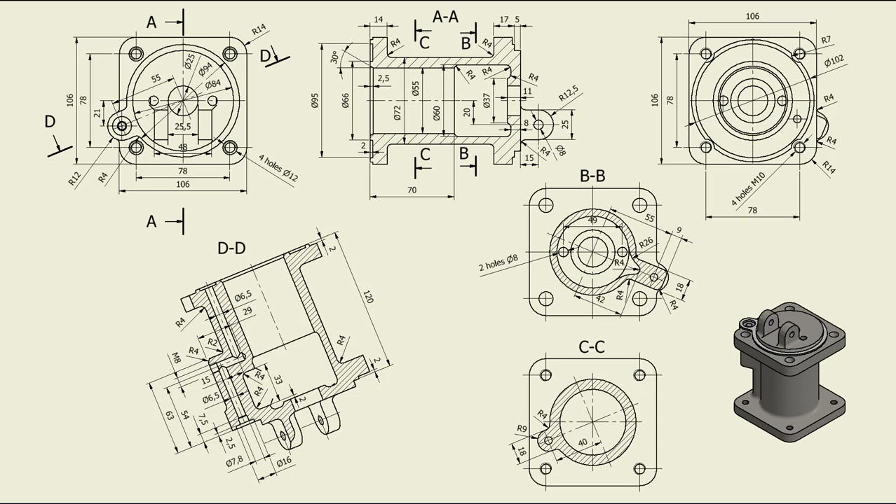Hi my friends, let's model part number 98, side housing, from my collection of 100 parts.

The picture shows us what this is about, and we can see there are two plates and maybe a hollow inside.

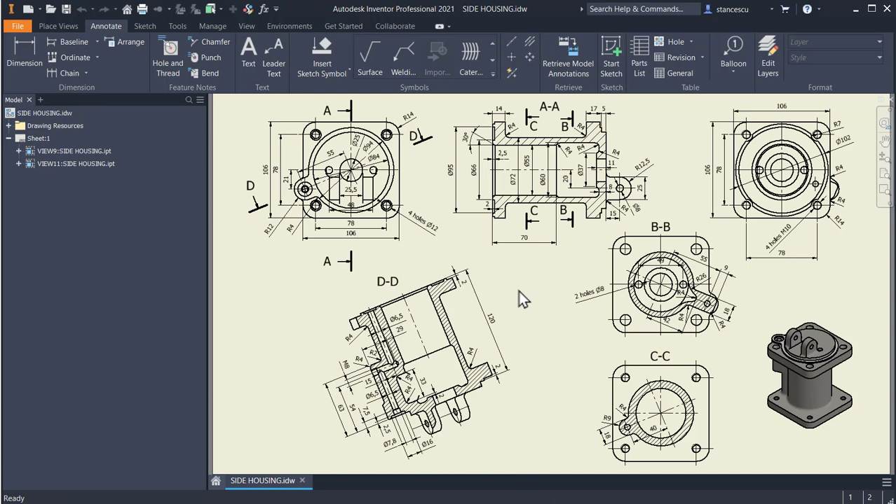The drawing is this. It seems nothing complicated. There are some holes here, but no problem.

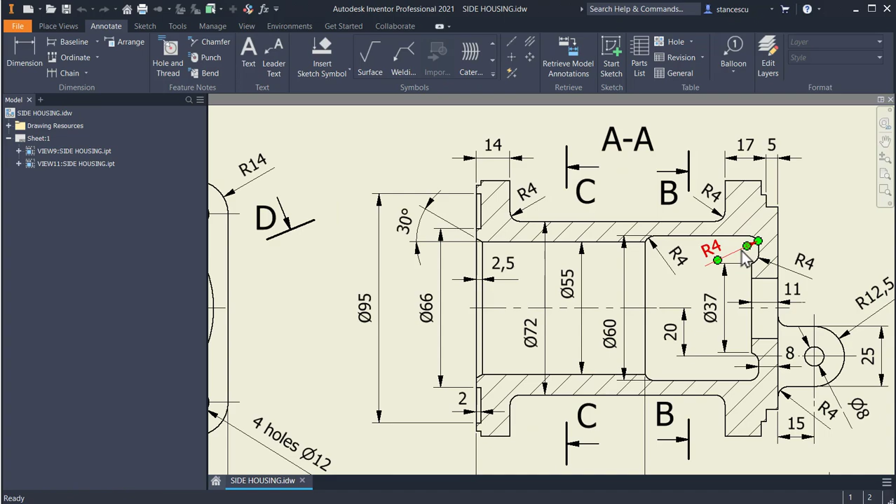We start by creating this contour, which is 17. Yes, this contour, and then this face is 17 minus 2, the thickness of the extrusion.

Okay, let's start with this contour. Dimensions are here. A circle with a diameter of 94.

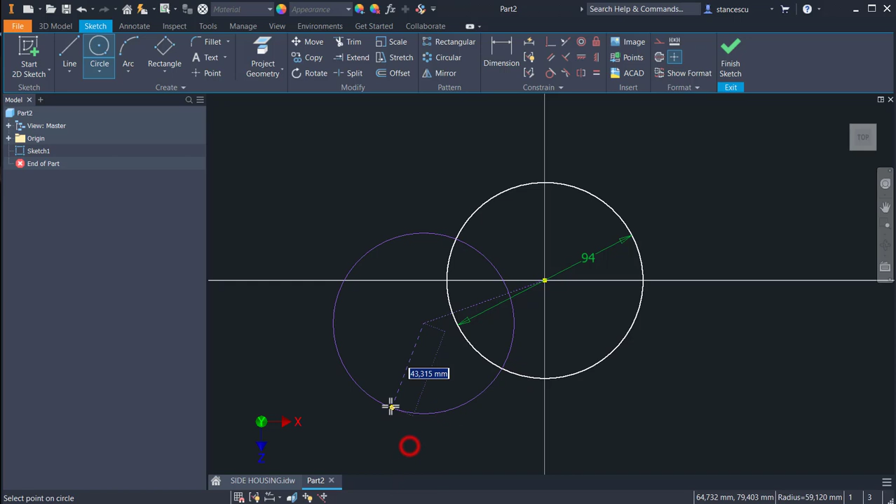Then a line, construction line, with a circle radius 12. Radius 12. The length of this line is 55, and the distance to the center point is 21.

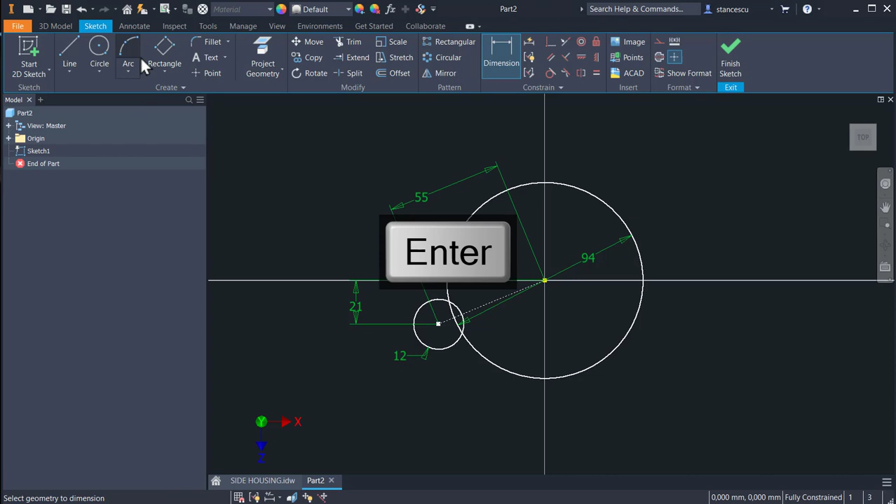We draw tangents, restart, parallel tangents, trim, trim a lot, and parallel between these two.

Finish sketch, extrude on 17, but the other direction. Okay, F6.

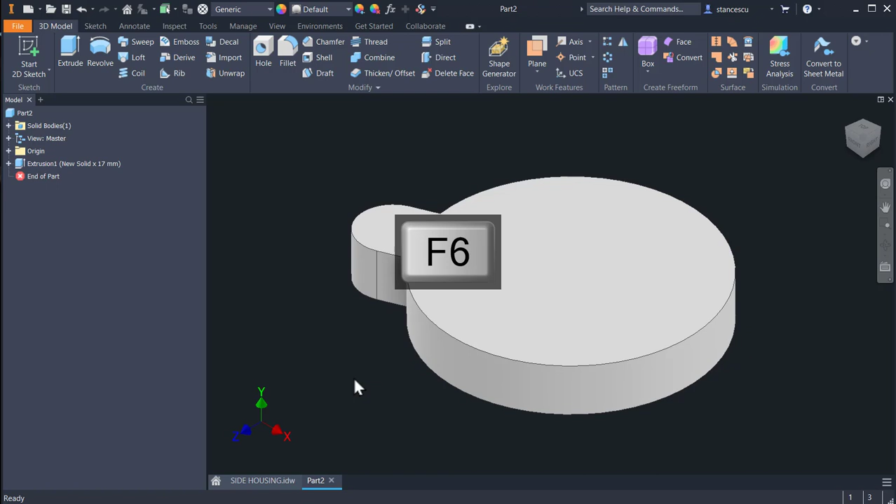Next is the other contour we created here, a rectangle with a center, a square rectangle, 106, tab 106.

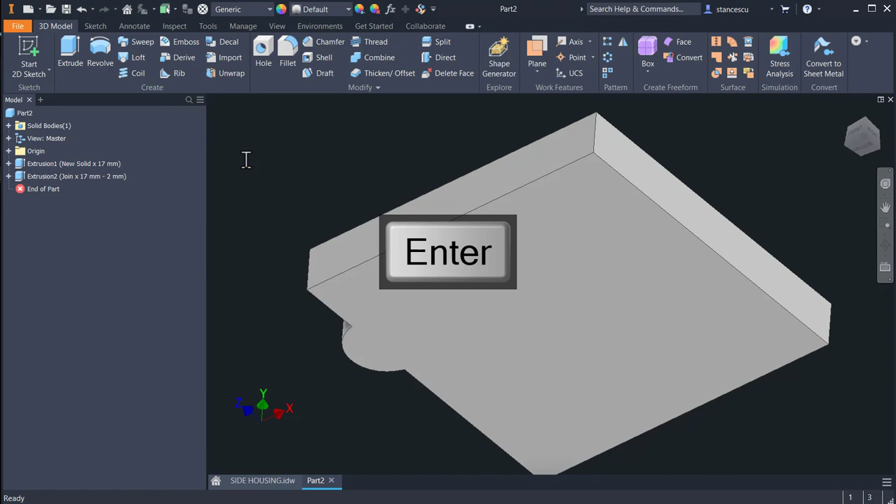Finish sketch, extrude this, the other direction, join 17 minus 2. F6.

Radius fillet, radius 14 to every corner. Okay.

Next, there is an extrusion of a circle and two extrusions to be rounded. As you can see, the diameter is 84 and the height is 5, and these are two rectangles extruded with fillets on 3 ends.

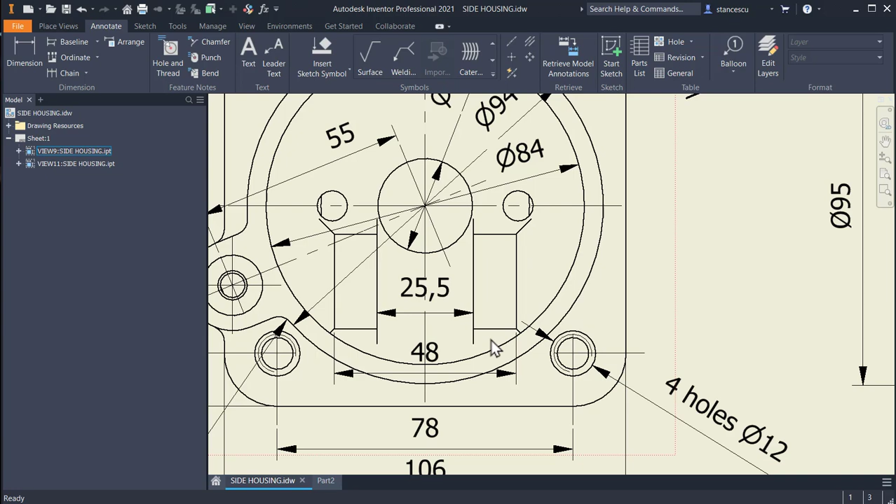These fillets, and you can see here also on the face, yes, on this face, back and face, not here.

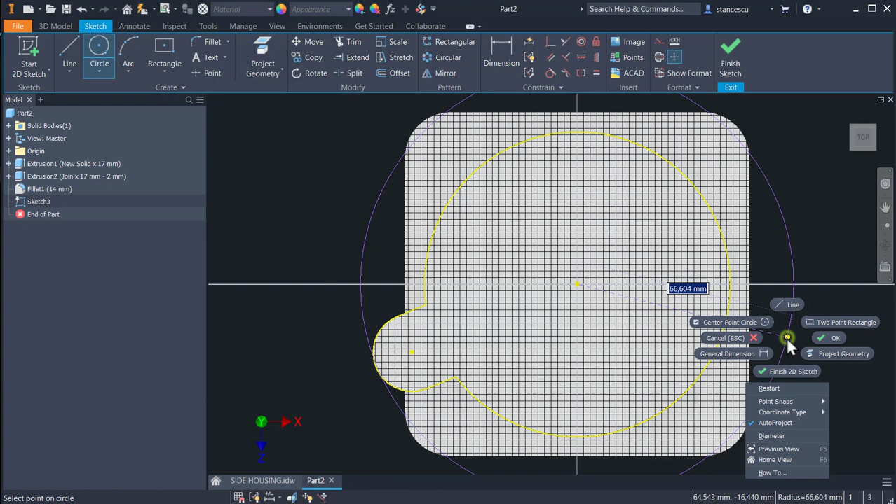Let's do sketch, circle with a diameter of 84, finish sketch, extrude 5.

On the same face, two rectangles, 1, 2, a line between the center. Oh, it is on the same horizontal. Very interesting.

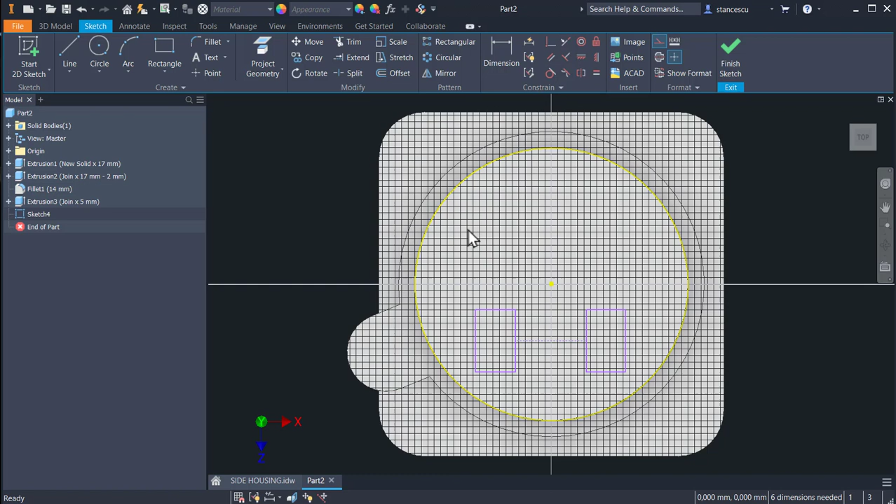This indicates that these are symmetrical and collinear by fortune.

Good. What I want is to place this midpoint on the same vertical with the center point, and to have these two equal. Dimensioning one is dimensioned also the other.

25. Distance here is 25.5, and outside is 48, and this mid line is placed at 20. This is why I placed this line here, to apply this dimension.

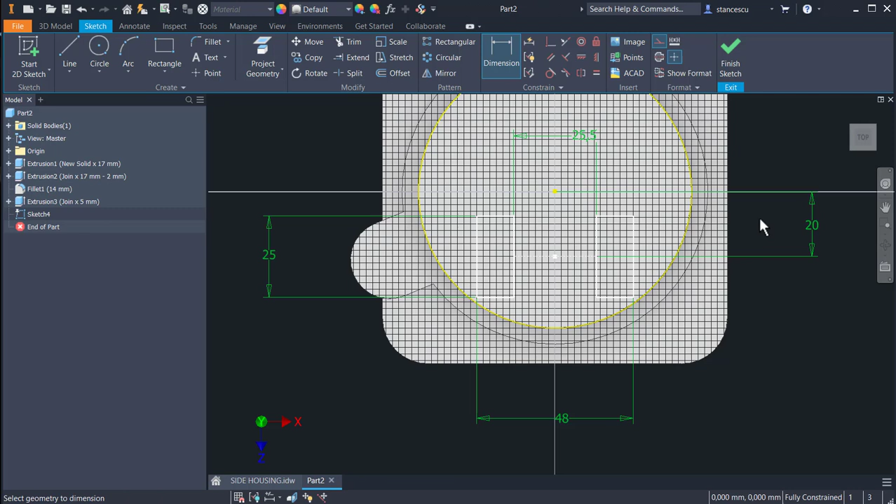Extrude the two rectangles on 15 plus 8.

Fillet, 25 divided by 2 is the radius.

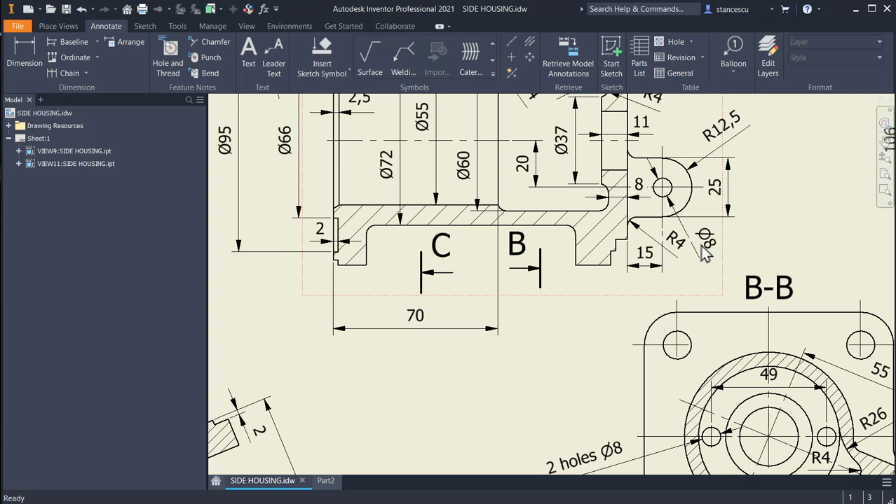Okay, and I place also this hole. You see the height is 15 plus 25 divided by 2, and the hole is through both bosses. How can I call this two?

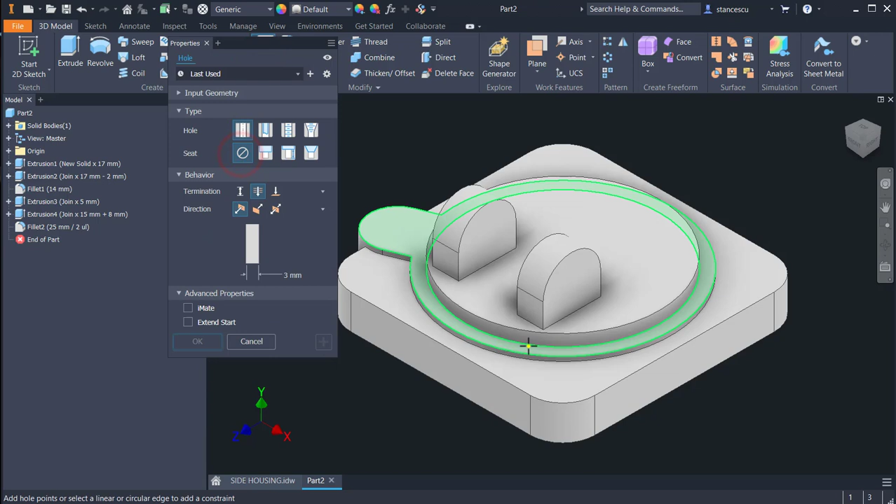Diameter of 8, through hole. Simple. This face, this center, 8. Okay.

Next is this cylinder, which has 72, and the length is 120 minus 17 minus 2. Yes, we start from here to this face. Okay.

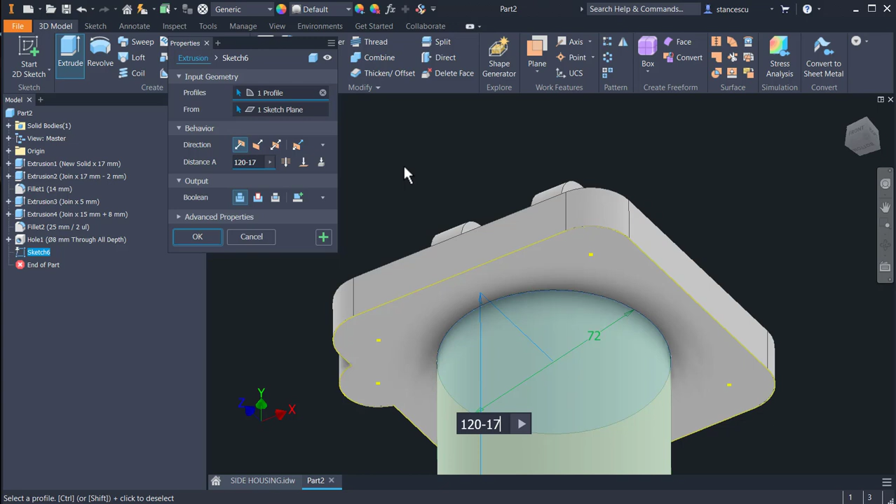This is the face, circle with the diameter of 72, finish sketch, extrude on 120 minus 17 minus 2. F6.

The other construction volume is this one, which seems to be 106, was the first, and this is the same with the same radius. Oh, this means we have to do almost nothing.

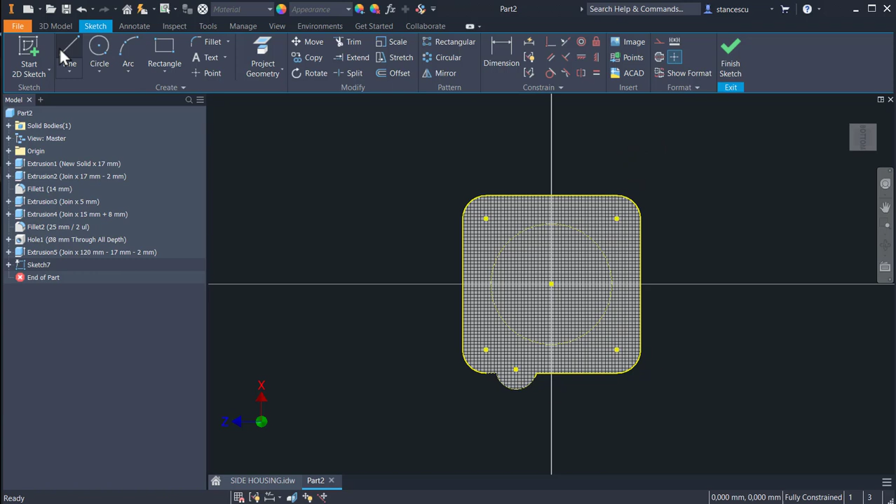This is the face. We project all this, but we make these two construction lines and also this circle. This circle must be a construction line. We draw a line between these 2 points.

And extrude in the other direction with join, and the thickness is 14 minus 2. 14 minus 2. F6.

You see, this is 14 minus 2 because, and also here, these are on the same line, because our cylinder was to this face, not to end. Good.

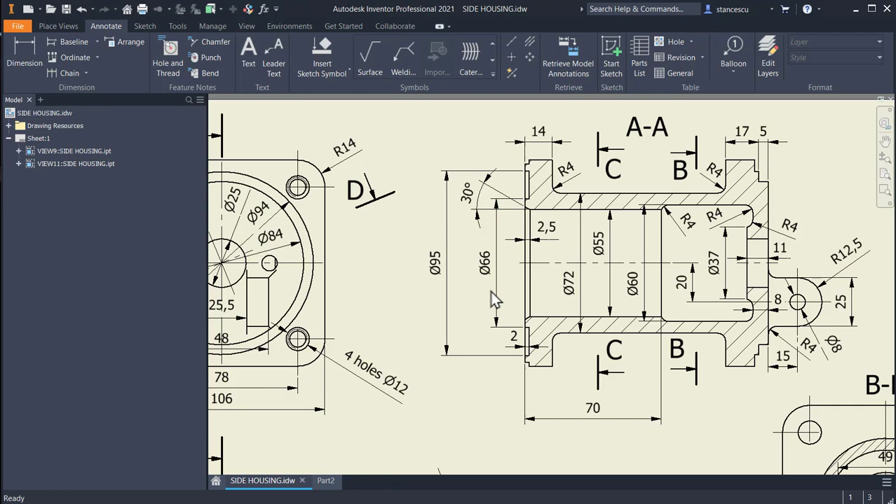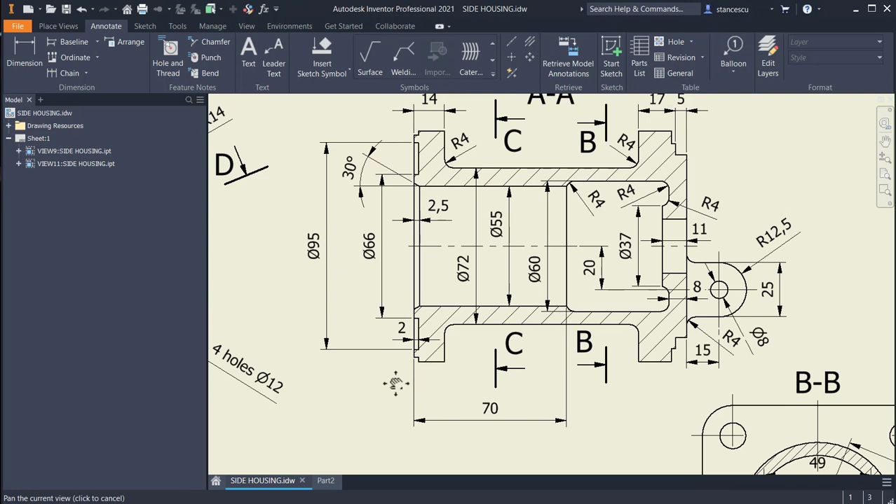Next is this face with 2 extrusions, 1, 2, which are this and this. Diameter 66, diameter 95, and external is 102. We have some cuts, radius 7, to apply.

Okay. Circle of 102. Another one. Oh, but I want to make all of them, almost all of them, construction lines. This must be white.

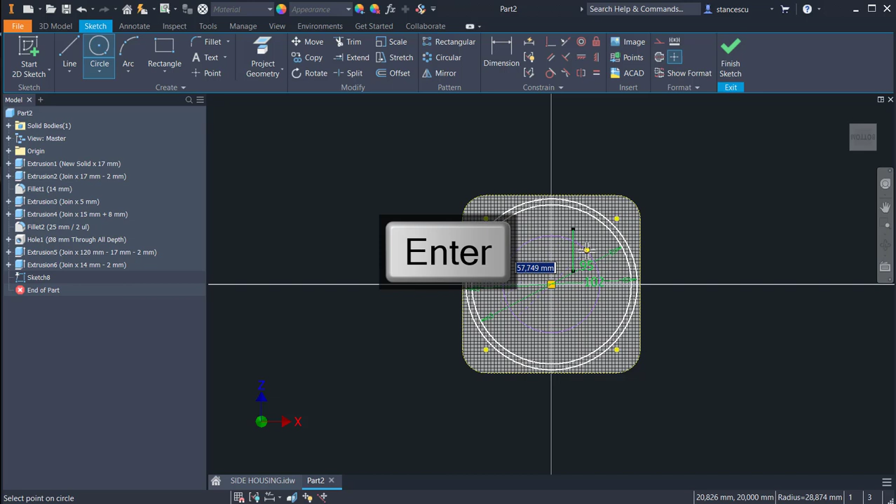Another circle of 95, and another one of 66. Good.

Circle, also circle, with radius 7. Radius 7 is this.

And other 3 which must be equal to the first one. This is not coincident. So equal these 2, and also these 2.

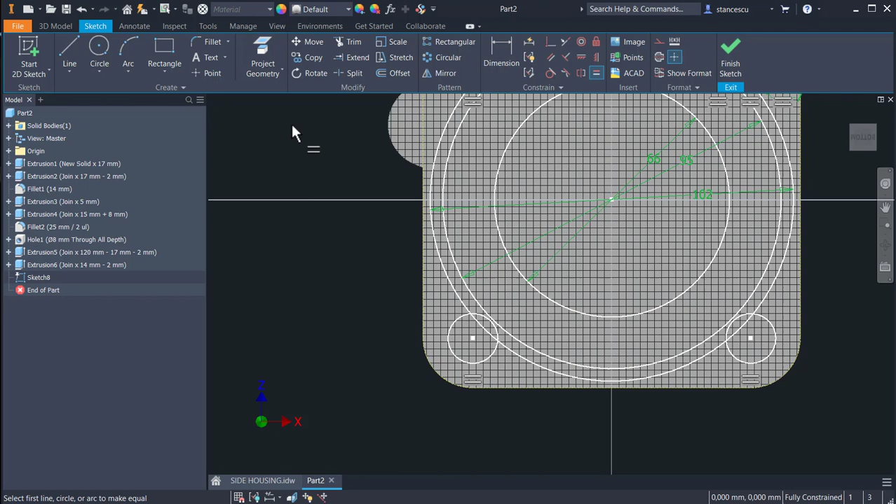Trim the outside circles and split internal, this and this, 1, 2, 1, 2. We make them, this is not split yet, now it is.

We make this all as construction arcs.

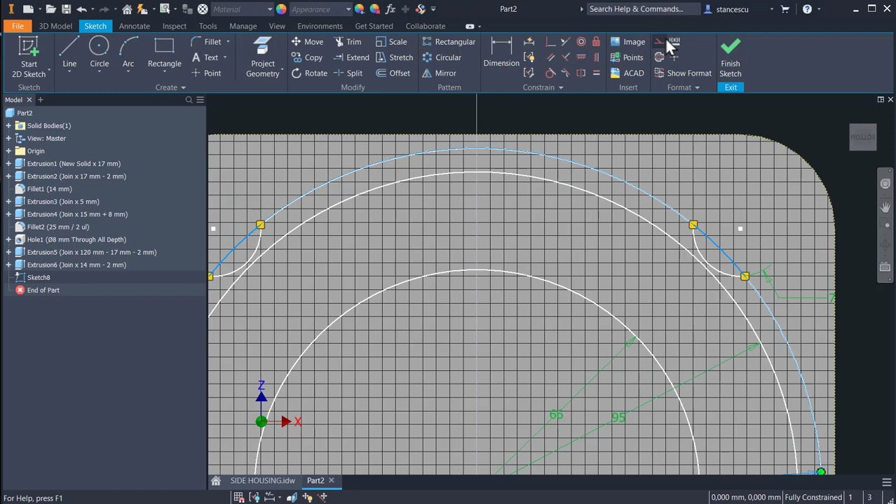As you can see, what is the height or thickness of this extrusion? 2 millimeters for this, and this, 2 millimeters.

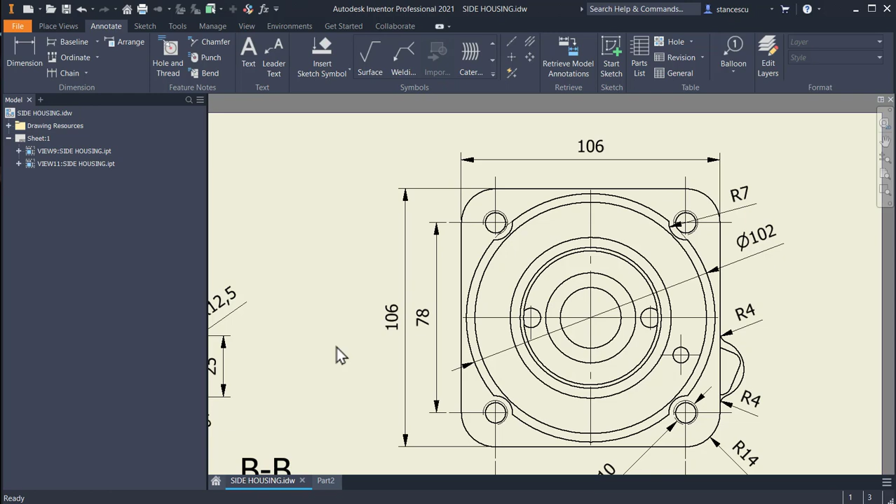Okay, next is the internal hollow, which is presented here. Diameter of 55, 60, distance of 70, and with an end here of 37. Radius 4 are to be applied after.

Okay, let's create this hollow. I select the plane XY, F7, and we draw a contour. Line from here to up, then...

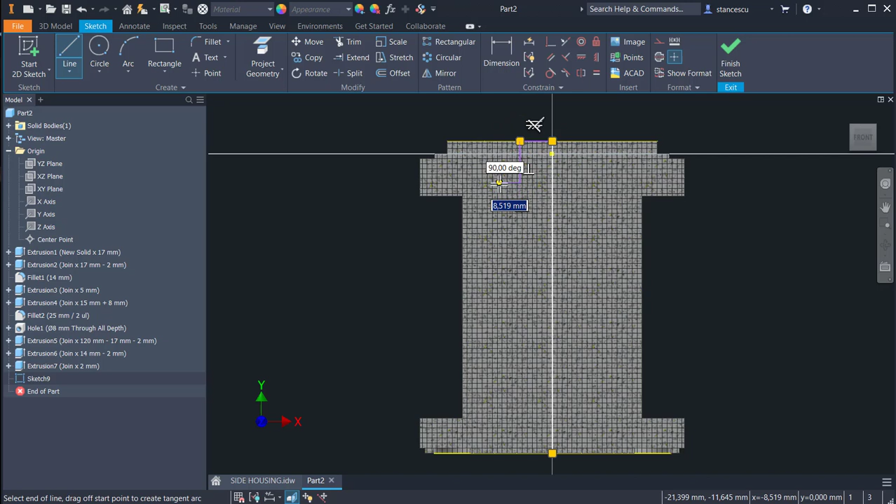This sequence of segments. This is center line, and now diameters of 25. This is 37.

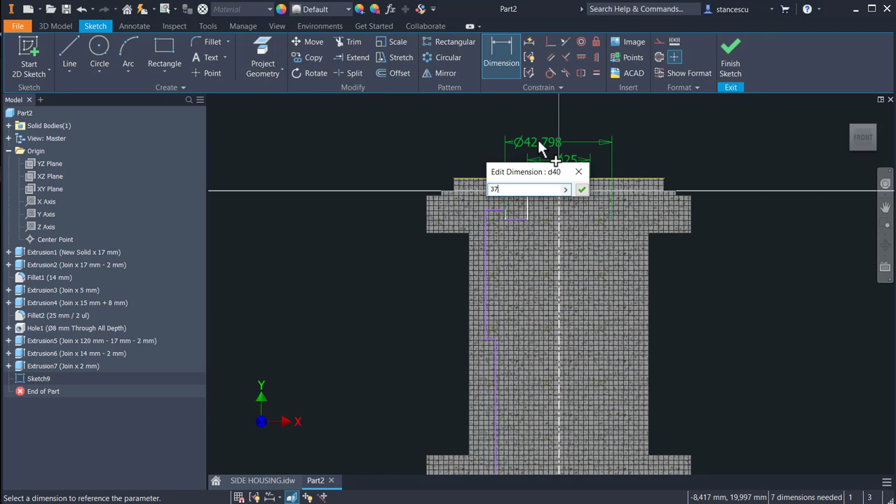The large is 60. The other is 55. Now distance is 70.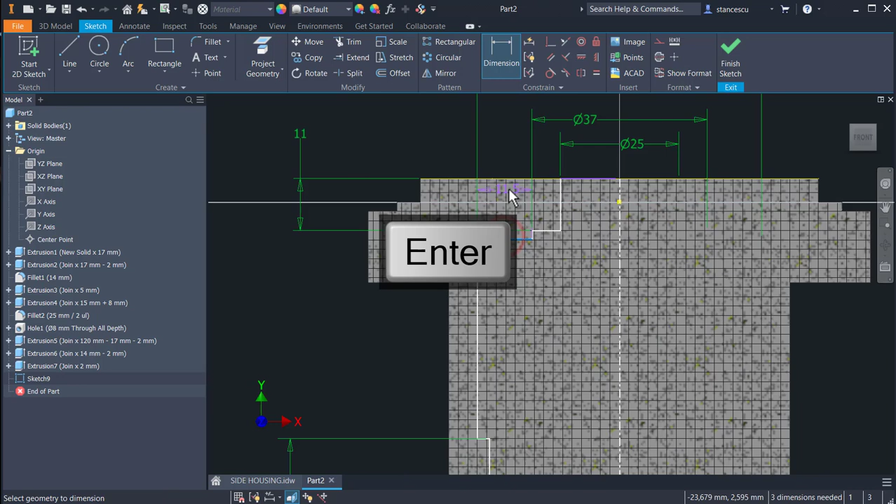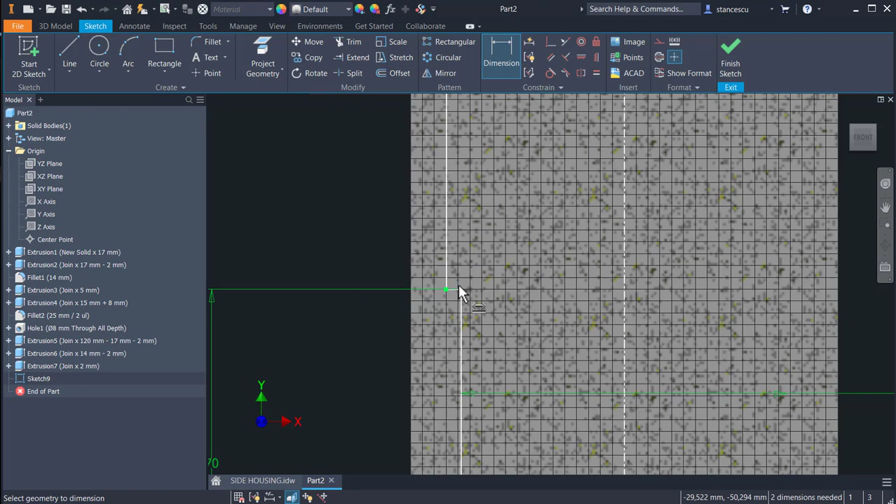11 is this, and 8 the other. Okay. The fillets here I'll create after, because for instance here is not 4 millimeters, only 2.5, and we cannot create fillets in a sketch of this kind. Finish sketch, revolve, cut, OK.

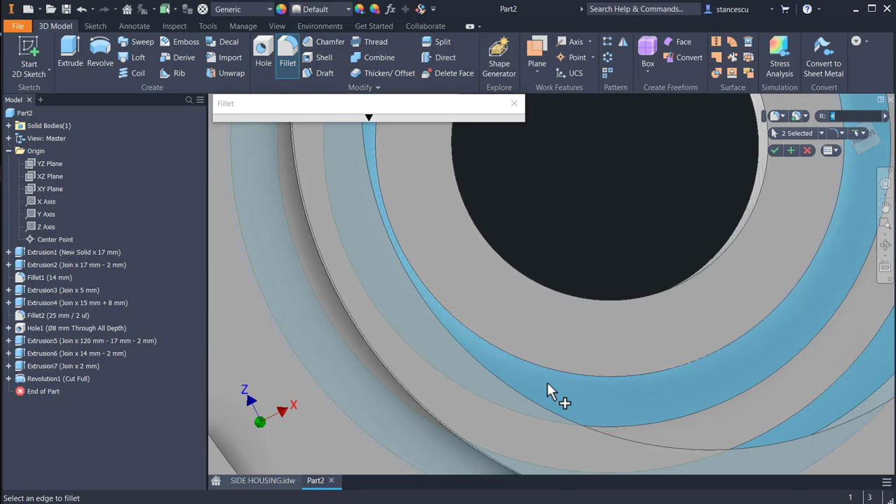And now that fillets, 4 millimeters, and here external is also 4, and looking from the other direction, this is also 4 millimeters, and we have this with 4, yes, without the internal sides. Okay, good.

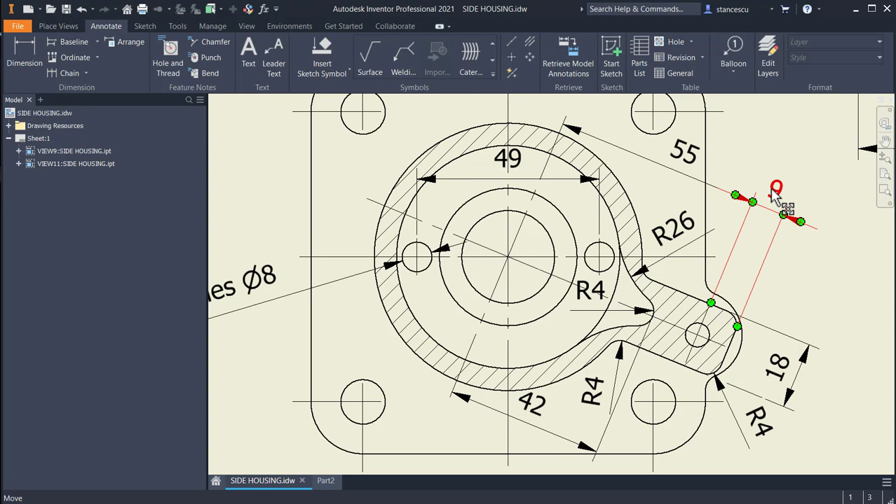We continue with this extension, which has a width of 18, a placement at 55 plus 9, and radius 4 on this face. Yes, the face, the other face of this flange.

Let's create this extrusion. F7. If you like the other position, I can apply rotation. X is still horizontal, and now I create a rectangle from 3 points.

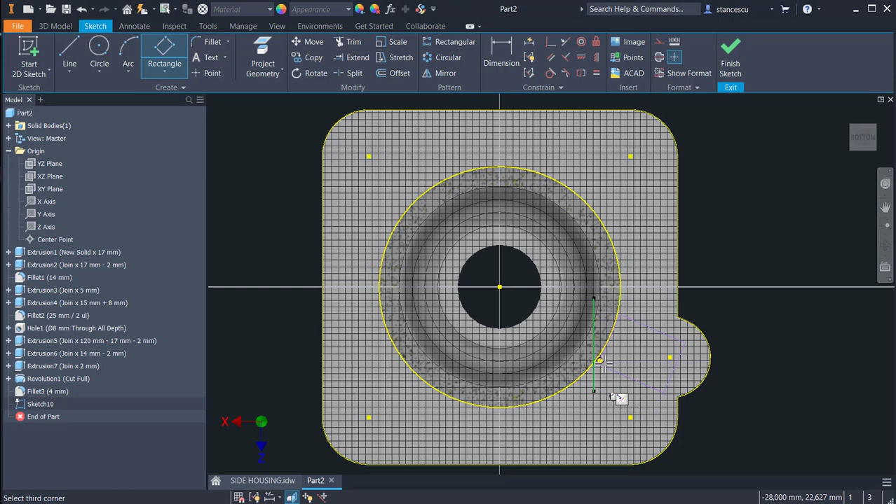1, 2, 3 is on the circle. If I place the other on the circle, it is very good.

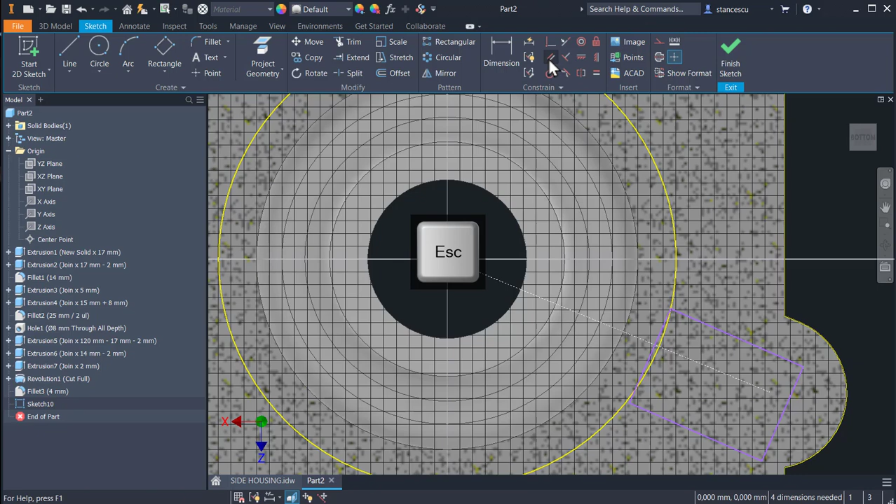And now I draw a construction line from this point to this point, to make parallel a side with this line, and to apply coincident of this point with this line. Good.

This is not defined. Yes. Dimensions from here to the center is 55 plus 9. The width is 18. The radius fillet is 4.

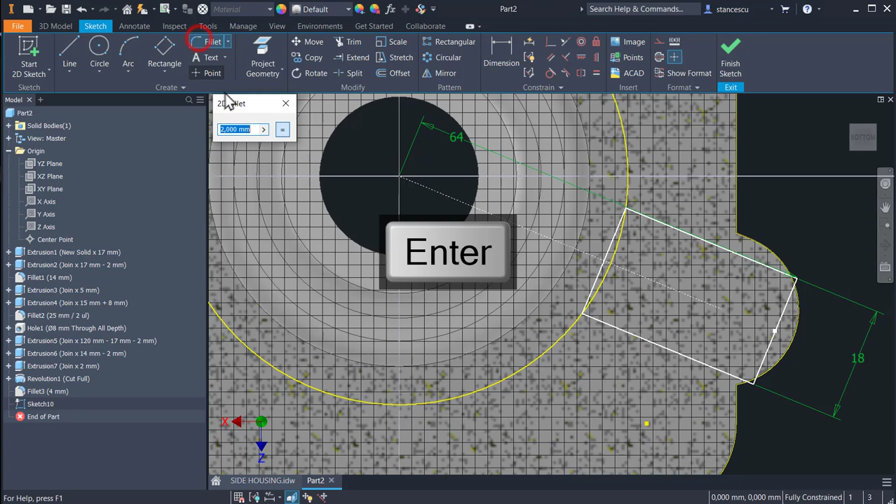Now this, once again, select separately, not at once. This is to be construction, and now we have everything to apply extrude.

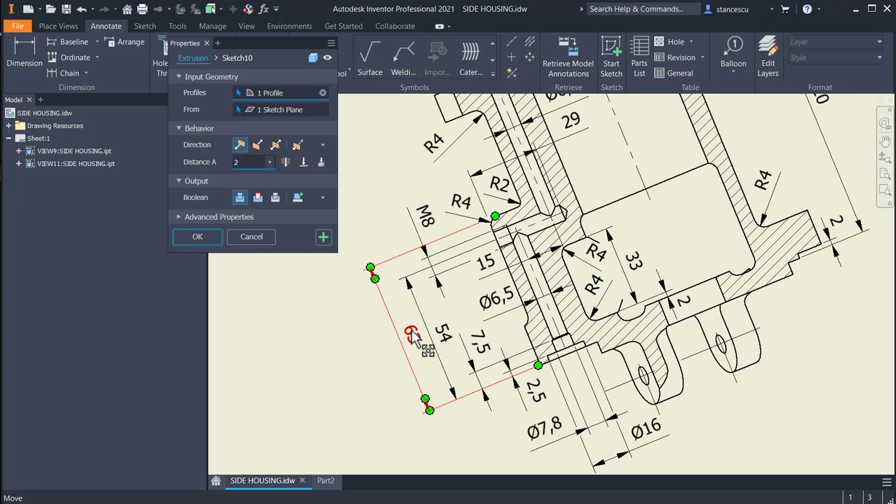Extrusion is made on 63. Look here, 63 from the face, but we start from here. This means that we have to subtract 17. Yes, 63 minus 17. Okay.

Now I don't change the view. I want to make this, yes, which is under the previous, is this. Dimensions are 40, 18 as well, and radius 4 will be applied after, radius 9.

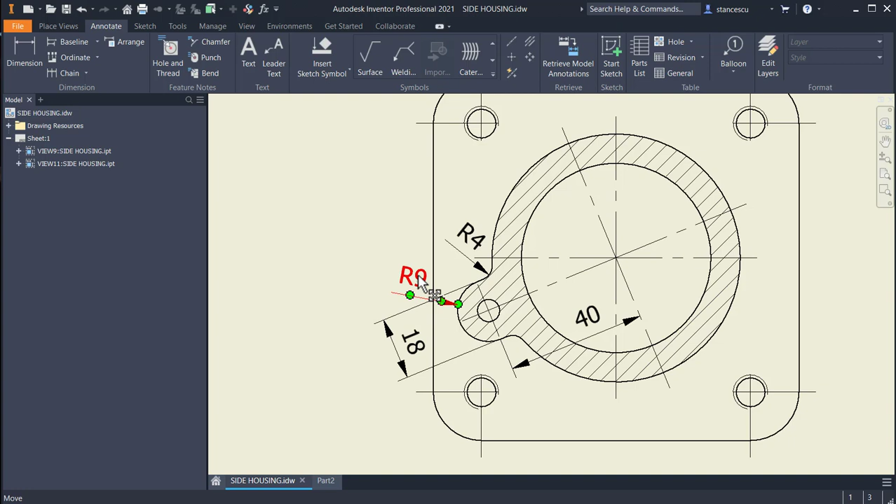Good. I select this to create a sketch. F7. The sketch is a circle. Tangent here and tangent to the other side. And this means that it is 18.

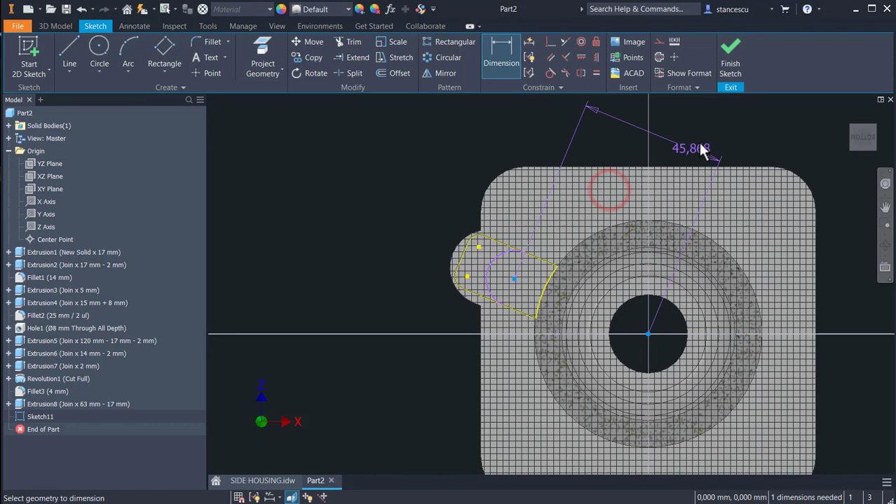Trim this, and 40 is the distance between these two aligned. 40.

Okay, I draw two lines here to close. No, the other is restarted, as you can see. Finish sketch, extrude this area to next. Yes. Okay.

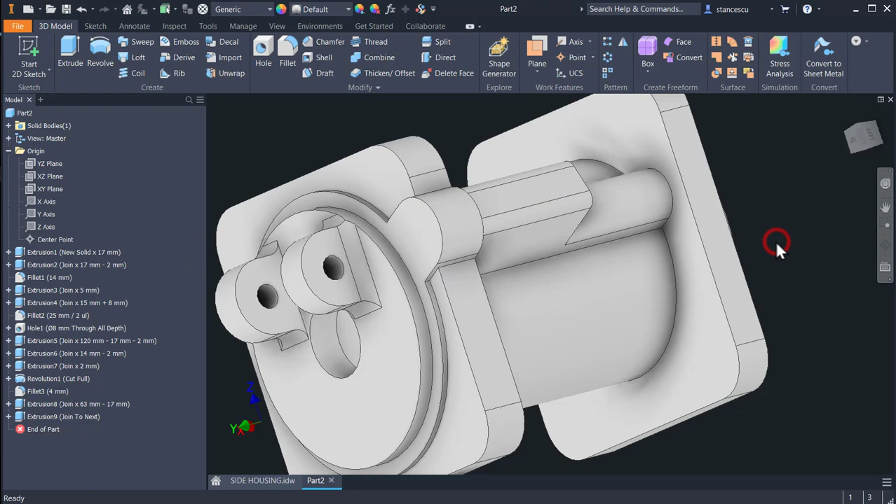F6. Now there is a special contour here to be subtracted, to be eliminated, which starts from 2 millimeters from this face and has 33 height.

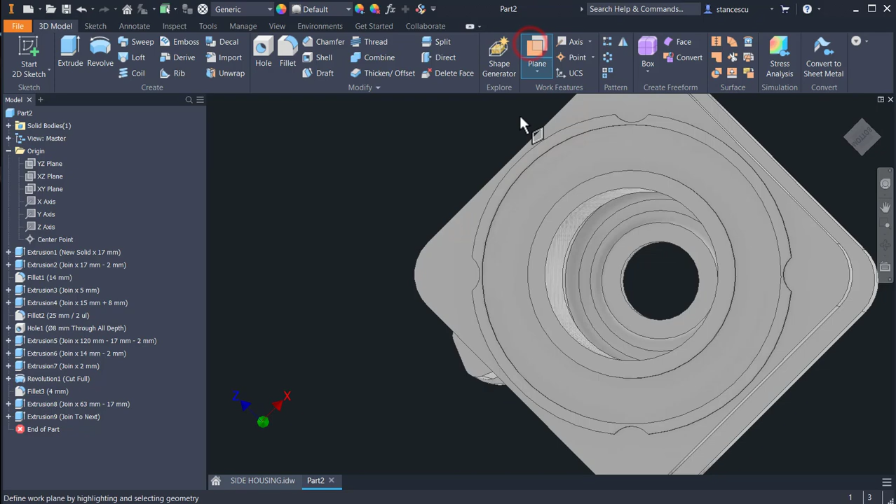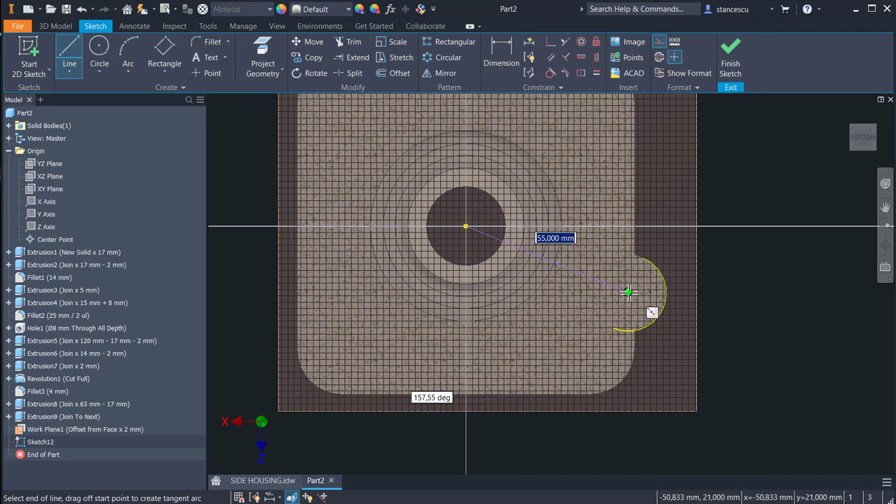F7. We know which is the direction. Now I turn also in position. We project this geometry to have direction. I draw a line between these two centers, construction line, and then...

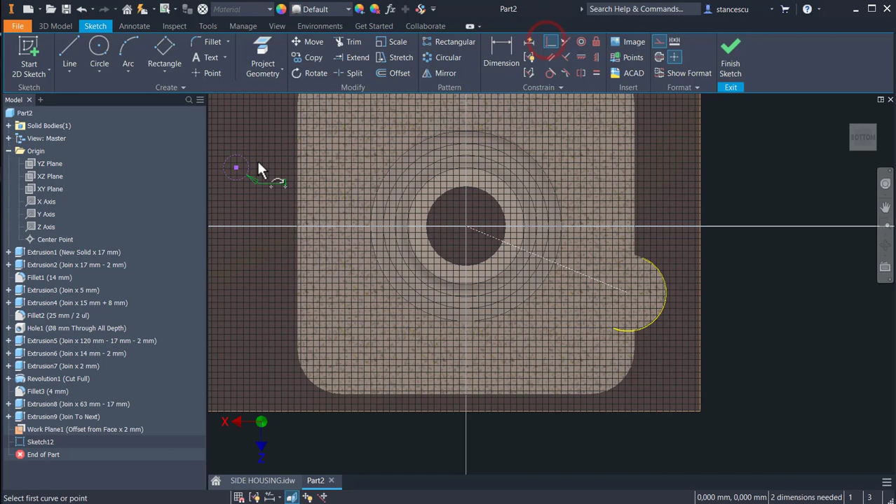A circle with a radius 4 to be placed on the line, but not this end, this end. Yes, and this must be not construction, and the setting is not so.

Dimension from here to the circle aligned is 55, not 55, 42 minus 4. 42 minus 4. You see this here. Radius 4, 42 minus 4, to be in the center of this radius.

And an arc of 26. Arc from this point to this point, and tangent at least to 1, but I cannot find, so I apply manually this tangency between the arc and the two circles. Radius is 26.

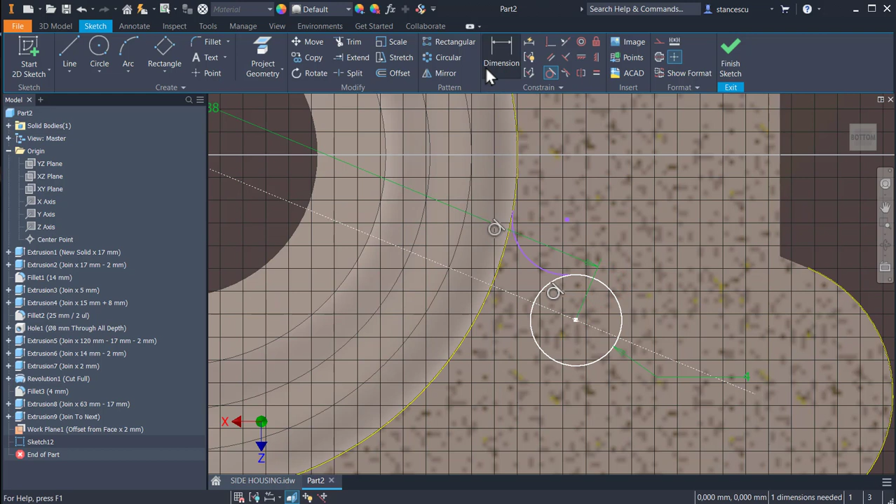Good. Now mirror for this last arc about this axis. Trim, and that's all, because we can select that face, that contour. Extrude of this, it looks like the curve, Gauss curve.

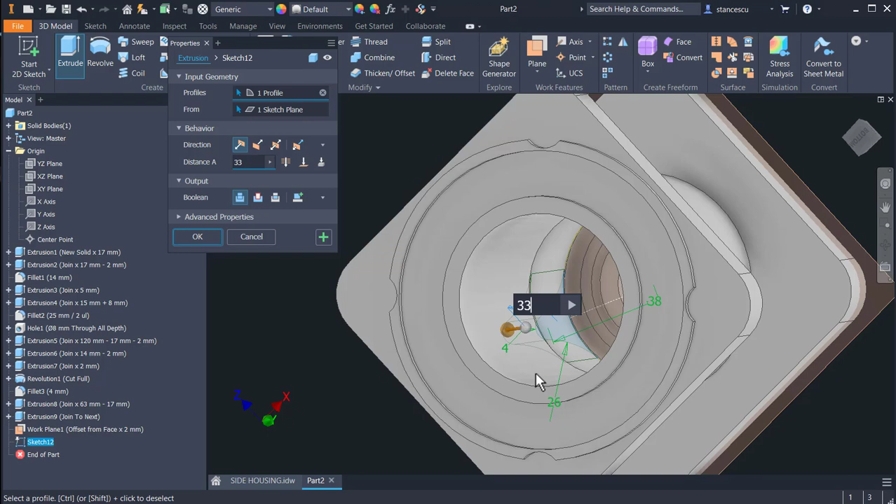On 33, which direction? Yes, this direction with cut. Now the other direction. Okay, you see we have...

That hollow contour. Now I want to apply radius fillets inside, and you can see that everything is with radius 4. You see here 4, 4, 4. The only 2 is this one. The other are 4 millimeters. Let's start with this, and then we'll apply the 2 here.

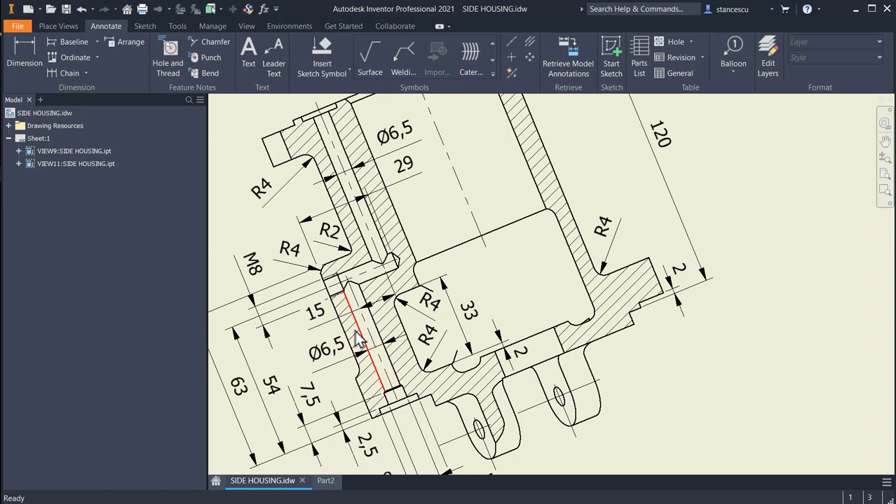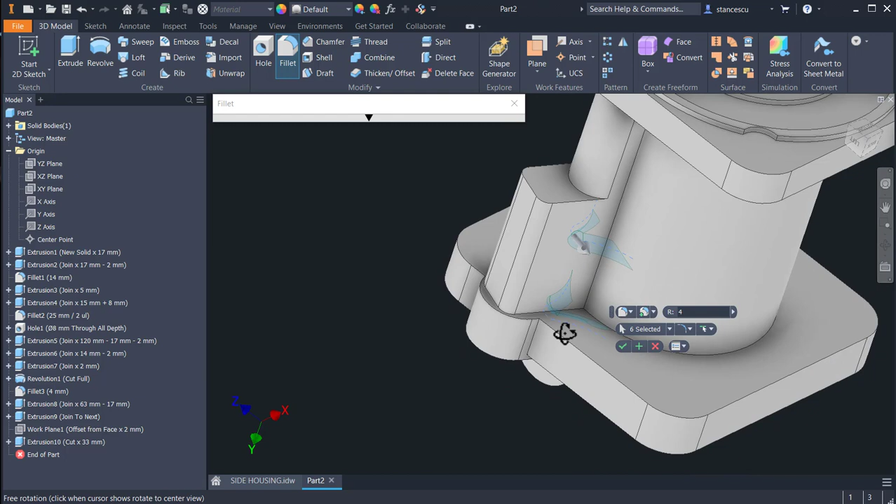So this is radius 4, and this is also radius 4 up. Then we go outside. 4, 4, and then 2, here 2, and we continue with 4 to this 4 and this.

I suppose that's all. Good. Apply. F6.

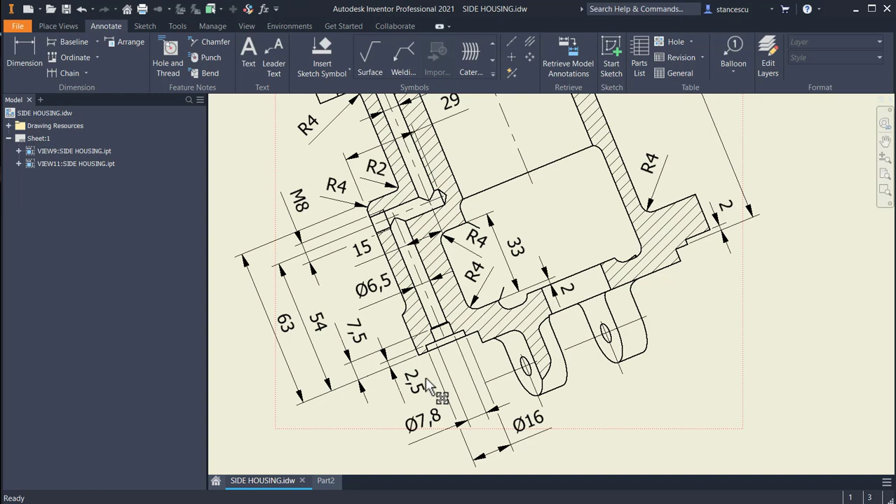Next are some holes. You see, this is very well placed. We start with this counter bore, diameter of 16, depth of 2.5, continued with this hole of 7.8, depth 7.5. This is the angle of the drill. Yes, and we'll continue with this after.

Let's apply. Where to apply? Here with this center. Yes, counter bore, simple hole, diameters are 7.8, not all is this, but 7.5. The counter bore is 16, and the depth of counter bore is 2.5.

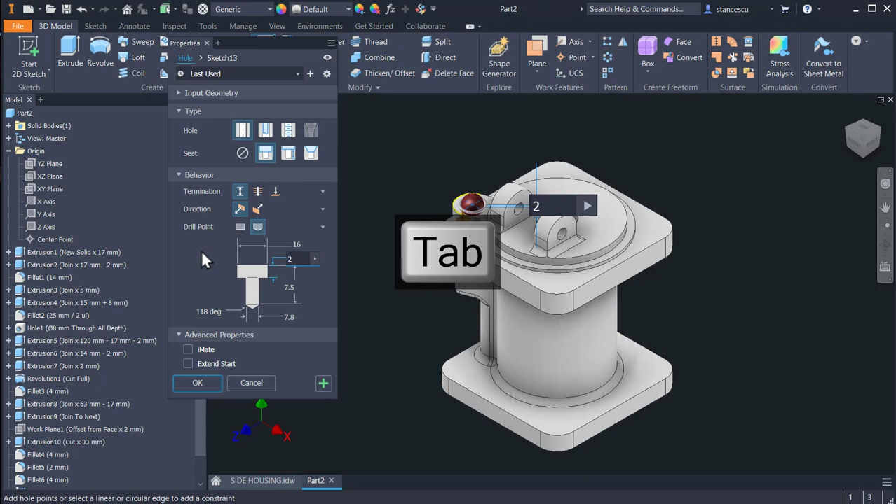Okay, now we continue with other hole, which is 6.5 and 54 depth from this face, not from this face. 54, 6.5 hole, not counter bore, distance, this face, from here we measure the depth, this center, diameter of 6.5, and the depth of 54.

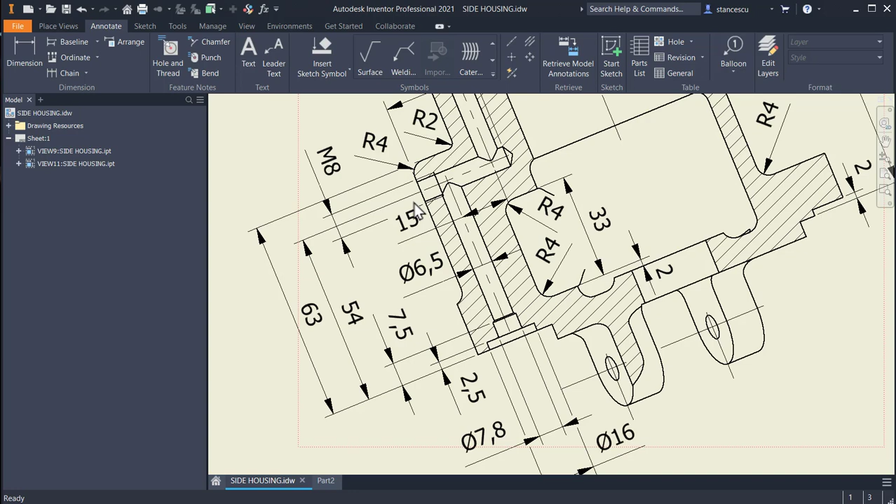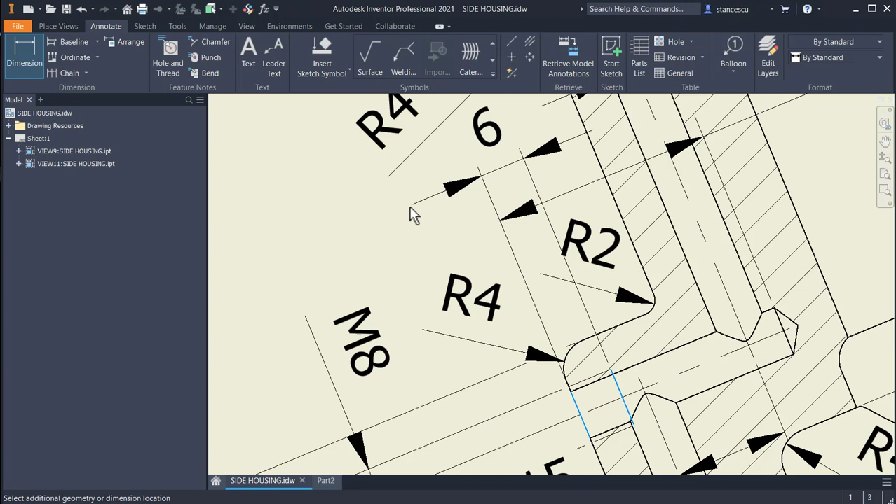Okay, another hole is placed here. Let's see. This is metric 8, but I don't have the depth. Let's apply the depth. I can modify always the drawing, and this is a contribution. 6 is here. I place it here, and I move this one up, but in the other zone. Good.

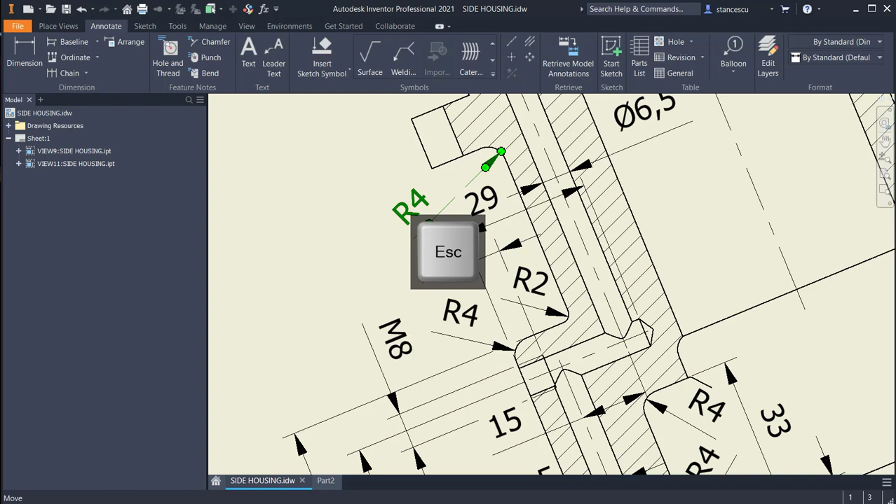So, metric 8 on 6. Continued with a hole of 29. This face, oh, I missed the distance. Oh no, it's 54. This point, this face, a point on the same vertical with this midpoint, and the distance from up to here of 54.

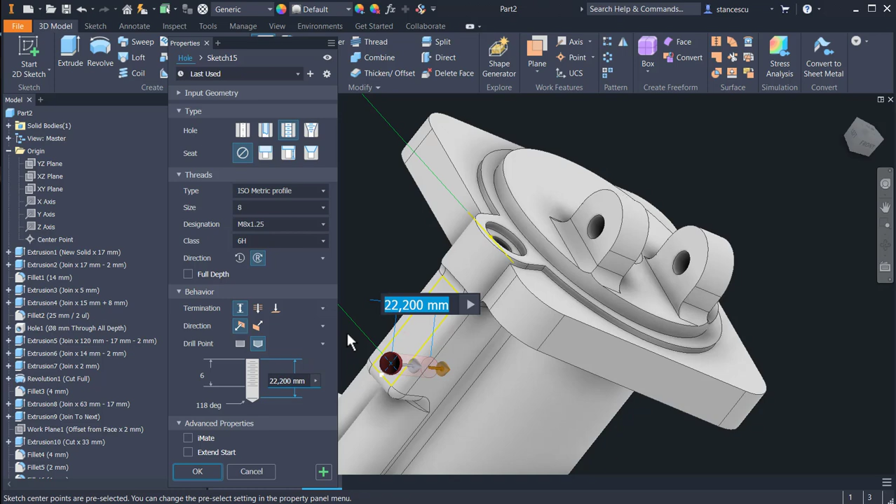Finish sketch, hole, threaded, not counterbore, metric 8, the first is 6, and the total is 29. Okay.

Now there is a hole. We start from this face. Let's see. You see 15 is the distance here, and diameter 6.5 to this hole. Good.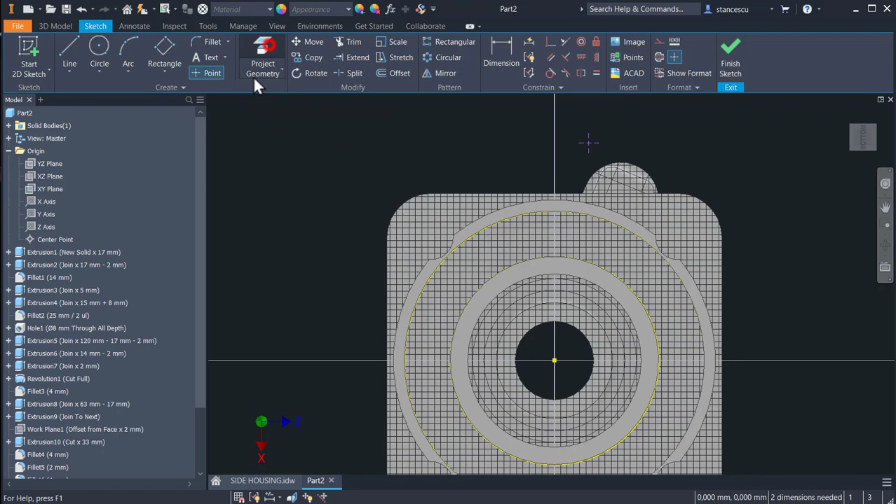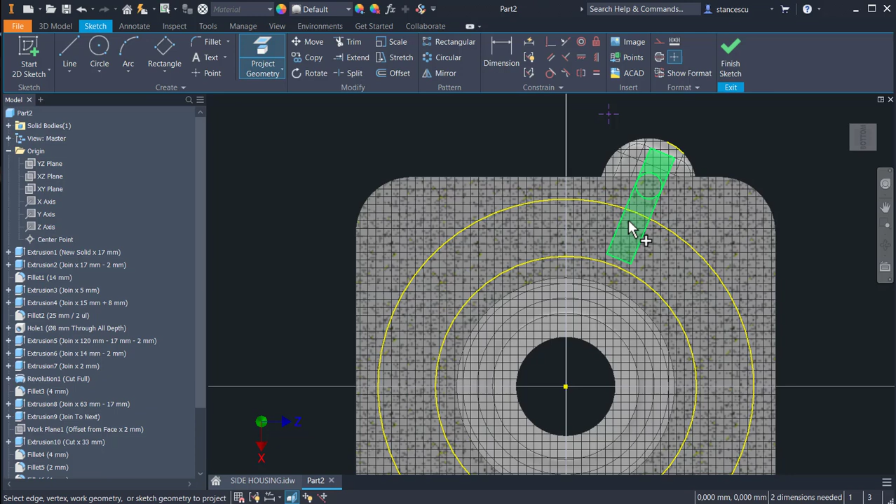We create a sketch here with a point placed on no line. We project this arc to have F7 to have a center. The center is, oh, I project the internal hole. Yes, because we know it is here.

To draw a line between these 2 points and to place our point on this line at a distance of 15, aligned. 15.

Yes, having this point, we can draw, we can apply a hole with diameter of 6.5, not metric, not threaded. 6.5 is here, and 2. This hole, we start from here, automatically selected. The point is to finish here, to this hole.

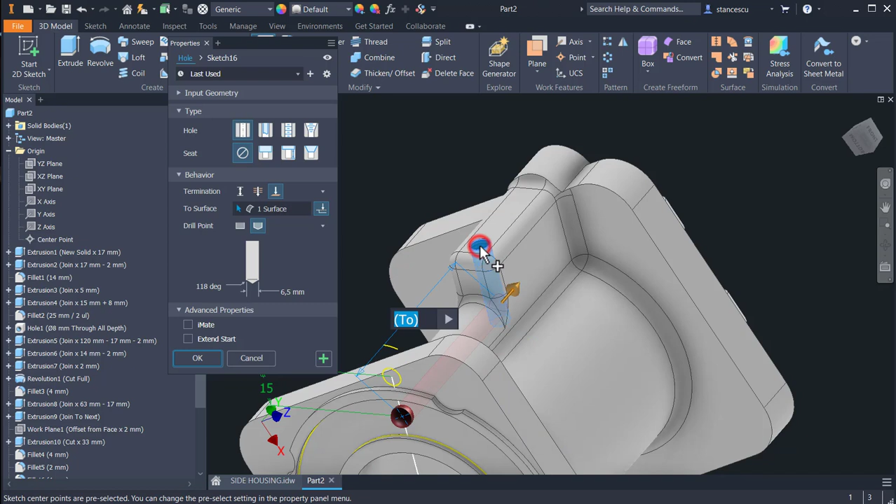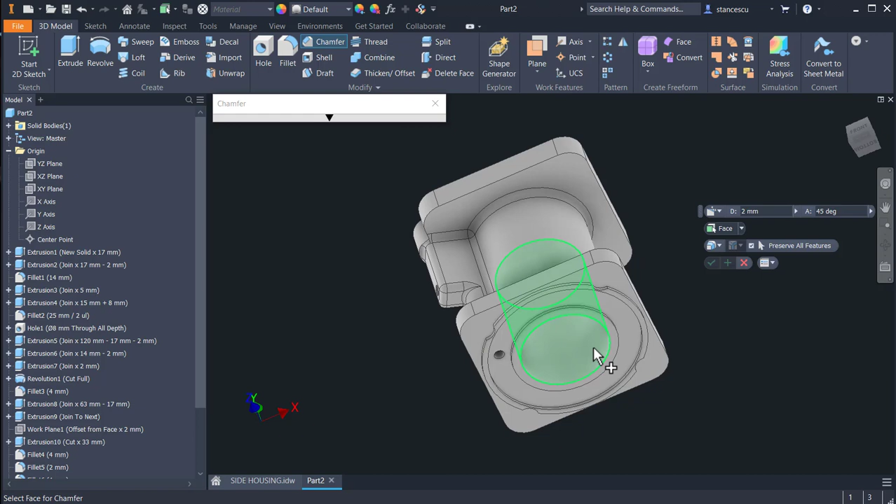Okay, very nice. Now we see that there is a chamfer here. Don't forget, 2.5 with 30. This is the place. I select other distance and angle. I select face as a reference for the angle and the edge. 2.5 and the angle is so at 90 minus 60.

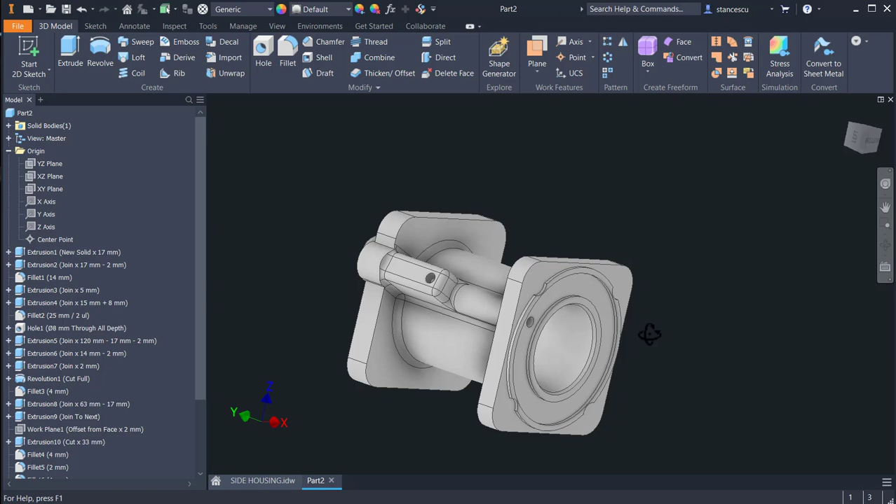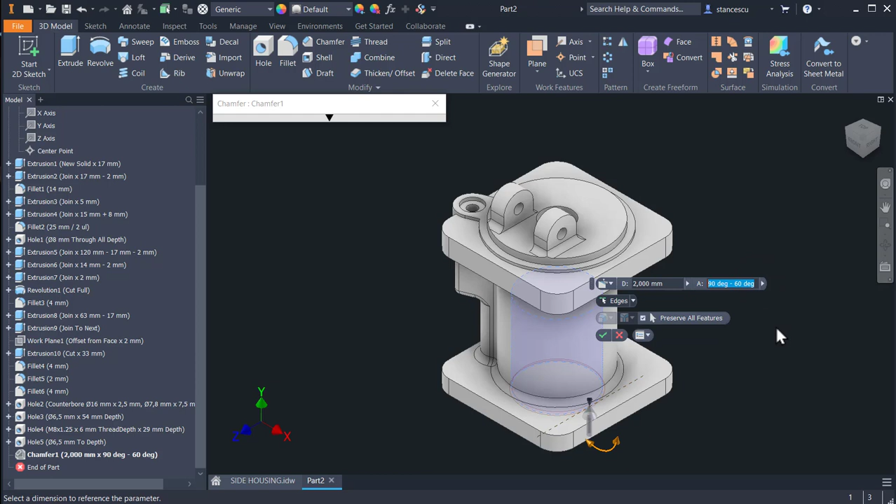Good. Not 90 minus 60, 30. Double click. The angle is 30. We have this dimension on the drawing. 30 is the same, of course. Okay.

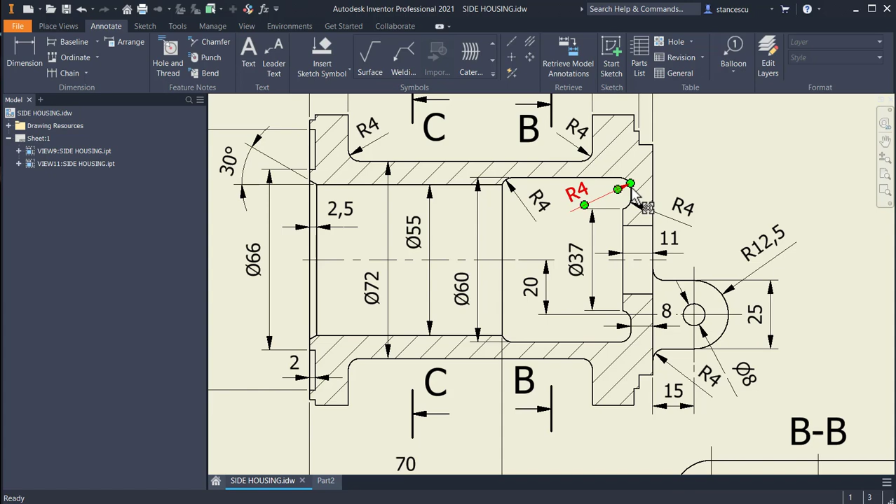Now there are two holes, 1, 2, on the upper face. They are dimensioned here. 2 holes of 8.49, but we cannot apply through because this is the larger diameter, this diameter, and I suppose that will cut from here if they are. I'll stop here the holes. 49, diameter of 8. This face,

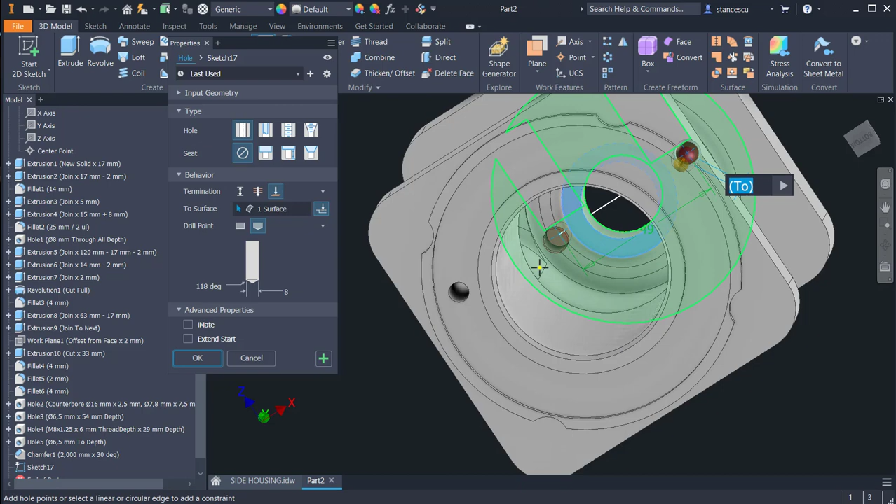A line, horizontal line, at 49, with 2 points at the ends and placed with its midpoint here. Hole 8 and 2 to this face. Yes, you see the hole is limited to that face. Okay, 2 holes, of course.

The last are these 4 holes and these 4 holes. They are placed in the centers of their fillets. 4 of them are metric 10 on the bottom. I think this is upper and this is bottom face.

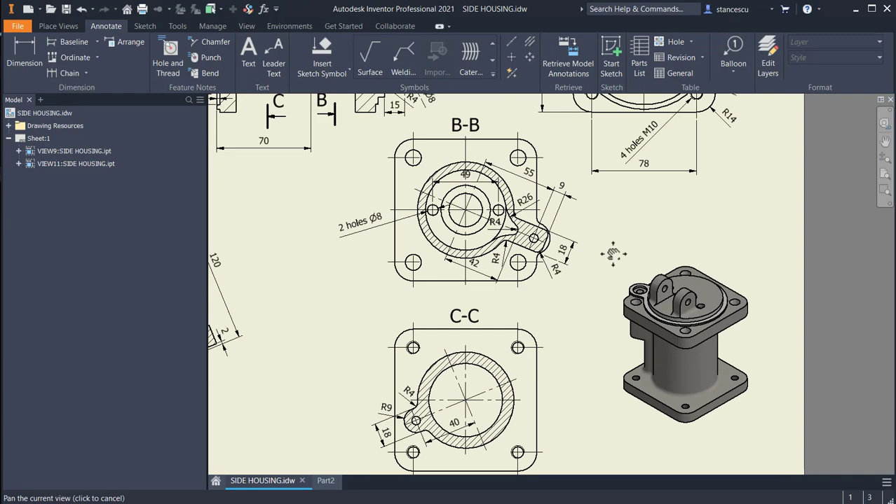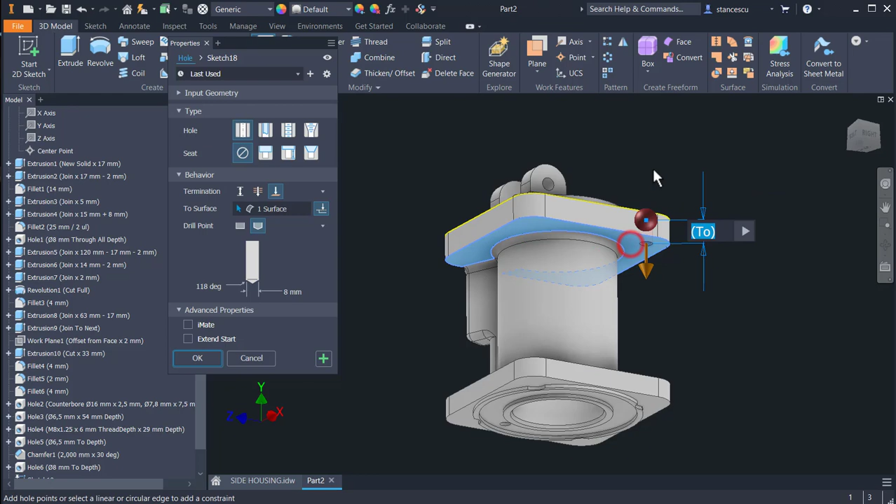The bottom is with holes threaded and the up is with 12. Good. This is with 12, not threaded. Hole on this point and to this face. We don't want 12 to be over metric 10, of course. The other points are this one, and this one, and the diameter is 12.

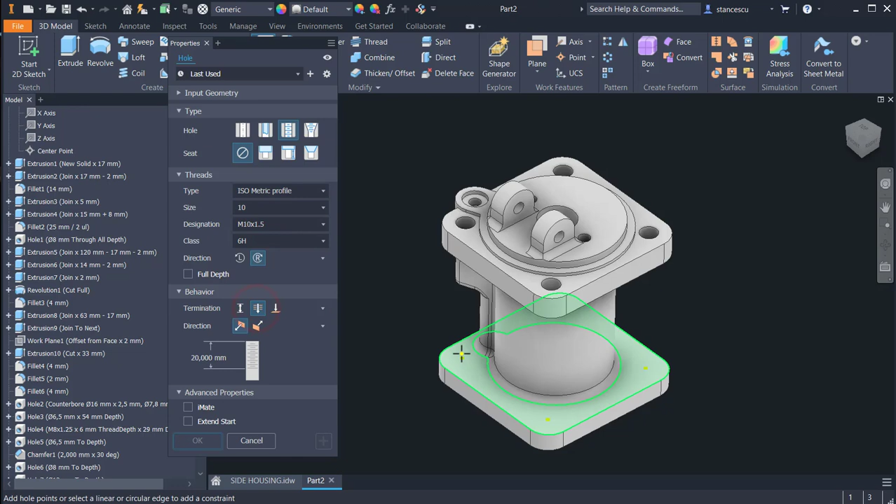Okay, the other face. This is through. Metric 8, metric 10, excuse me, through. Where? This point, this point, this point, and the last point. Okay.

I think that nothing was forgotten. Yes, this is the part, my friends.

Let's assign the material, which is steel cast, in the general aspect steel cast, and some faces to be machined.

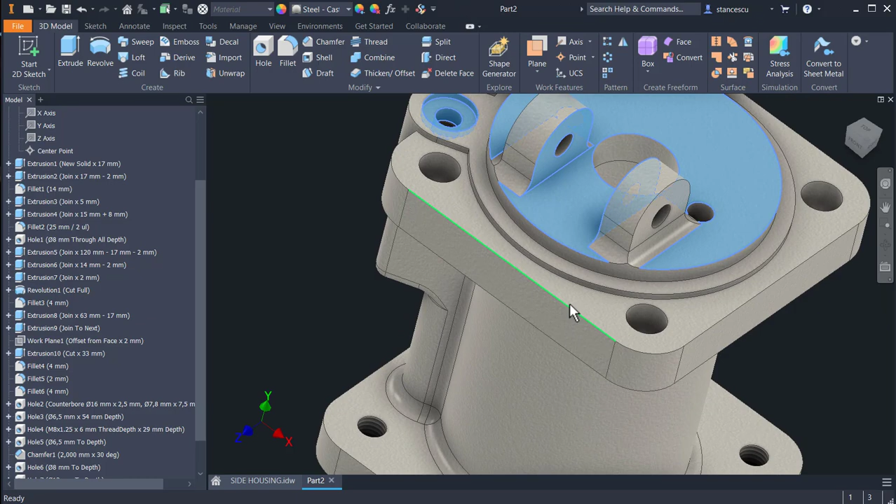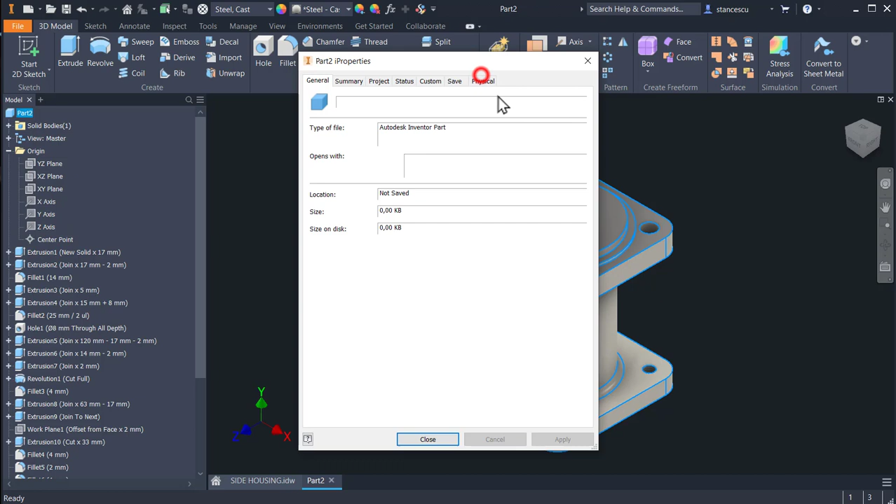I select what I think to be important, to be still polished. Data, iProperties for this part, AAA. iProperties, Physical, update, 3.5 kilograms.